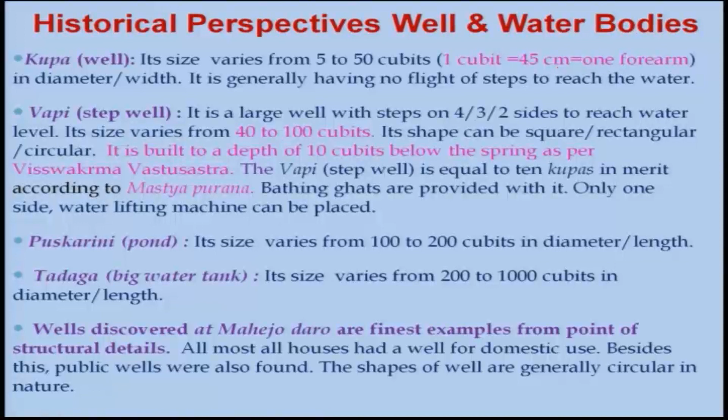Wells discovered at Mohenjo-daro and Harappa were the finest examples from the point of structural details. Almost all houses had a well for domestic use, and public wells were also found during the Indus Valley civilization excavations. Keep in mind that generally the shapes of wells are circular in nature, but if it is a big one, like a Vapi, step wells will sometimes be rectangular.

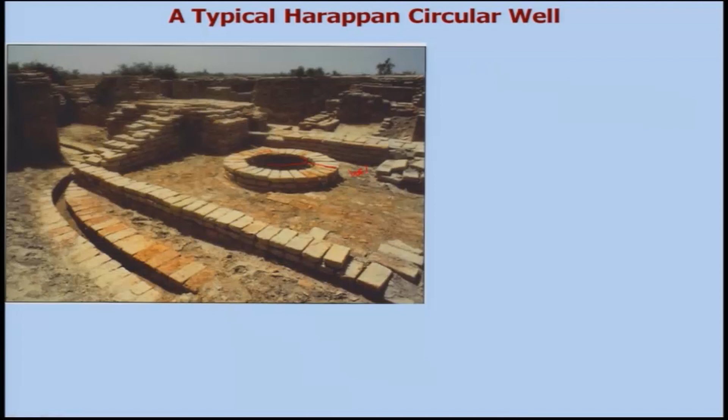Let us look at a typical Harappan circular well. If you look at this figure, this is the well, and these are all bricks, trapezoidal in nature, used to prevent inward collapse. Now suppose you want to make this kind of well and replicate it—I cannot, because where will I get trapezoidal bricks, who will make them for me?

At that time, people were making their own brick kilns; they had kilns of their own and could design and make the bricks themselves. Today it is not possible. When I was a kid, I had gone to a village, and I remember a person trying to make a house was also making a kiln for baking the bricks to be used in his house.

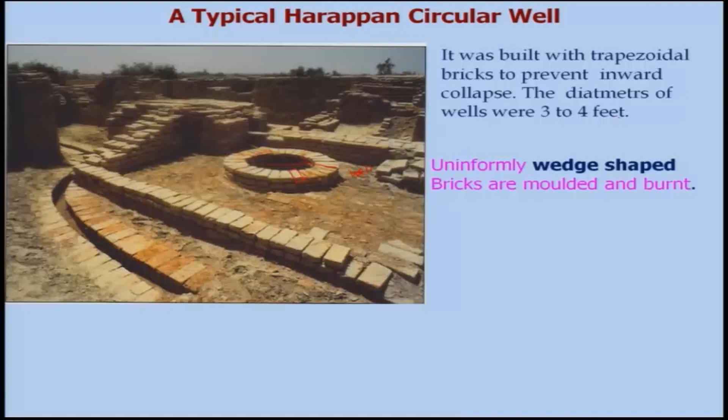The diameter of wells is around 3 to 4 feet. These wedge-shaped or trapezoidal bricks are molded and burnt properly, and the wider bricks are carefully curved. This curving is very essential to have a smooth surface, and generally mud mortar was used to bind these bricks.

This is a ground with pavements of brick laid here—these are the bricks. Look at these brick pavements and the well, which has a slope, because this is the drain. There is also another drainage system here, and from one corner it comes and passes through to this place.

Beside this, if you look at the top of the well, it was projected above the ground level, so that waste water will not enter into the well. This is not something people just did randomly, this is a well designed kind of thing.

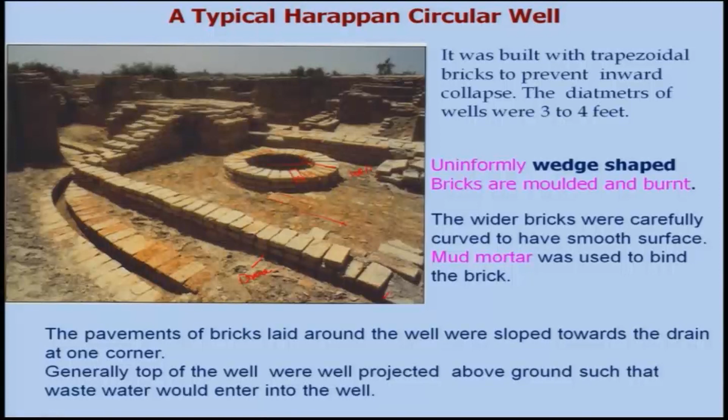There is also a lot of other land where water would be available, and they would store it from the rain in the form of tanks and ponds.

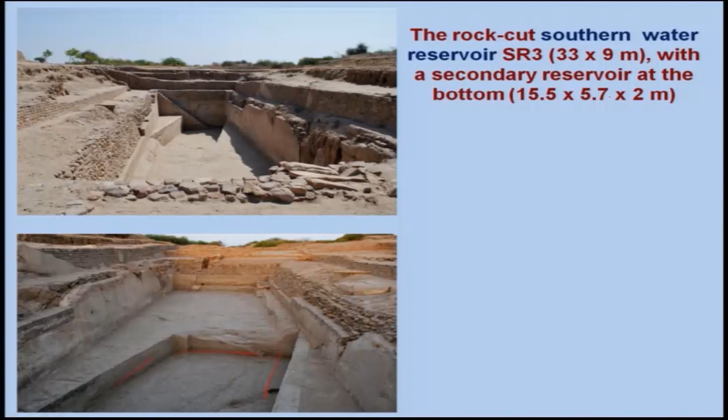Archaeologists found 3 massive reservoirs, used for storing fresh water brought by the rains, and also to store water diverted from the 2 nearby rivulets I discussed. That means they were using rainwater for storage, and also taking water from the rivulets or small rivers to store.

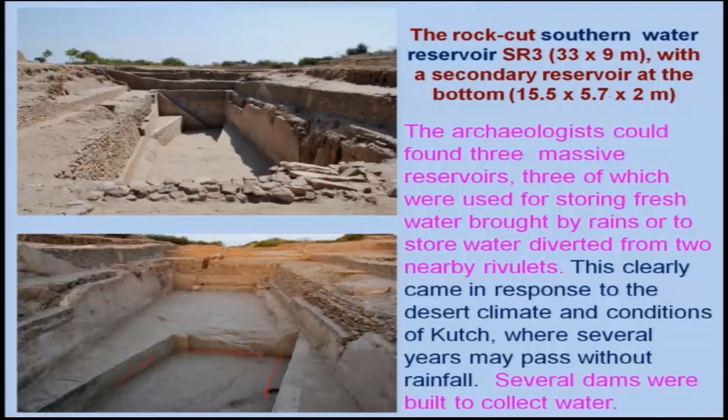This clearly indicates that proper management of water harvesting is essential to have a good life even in the desert climate condition of Kutch, where several years may pass without rainfall. Several dams were built to collect and preserve water. At that time people had concern, they had design, and they did it properly and used it - why not today? We will have to not only preserve it, but also use it sparingly, that is important.

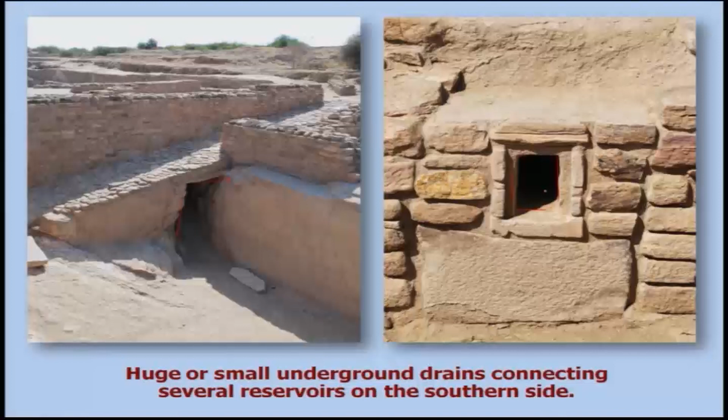One can see small underground drains connecting several reservoirs on the southern side. That means it is not the reservoirs alone, they are connected - if one reservoir has water, you can take it from another and use it. Suppose there is a flood on one side, the water will go to the other place not having water and be stored there. So there was interconnectivity during that time also.

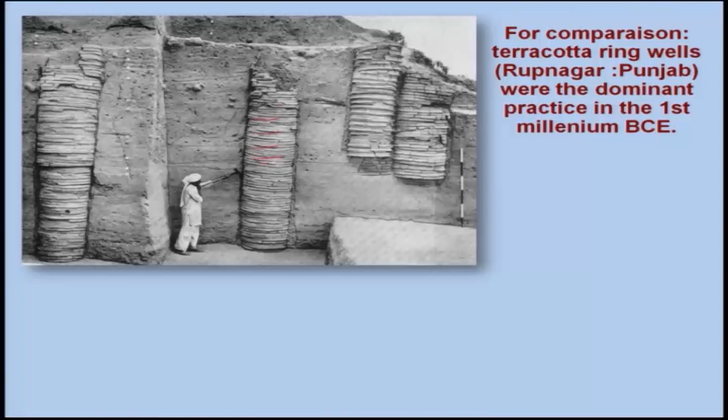These are the wells, dominant in Rupnagar. Now people are calling it Ropar, in Punjab. These wells dominated, and those are there in the first millennium BC. This has been dated by archaeologists.

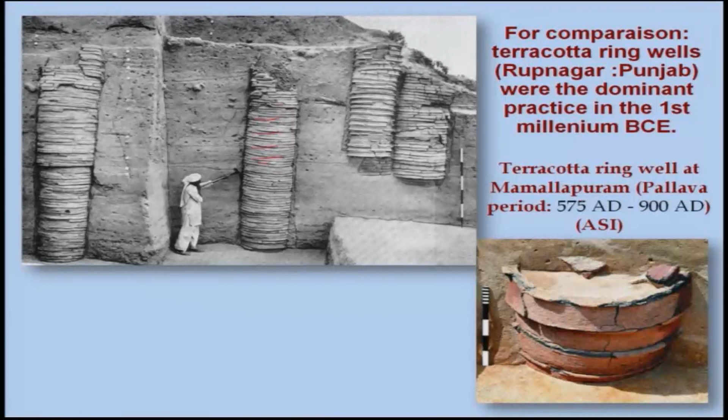Beside this, if you look at terracotta rings well at Mamallapuram in the Pallava period, like 575 AD to 900 AD, one can also find them. People have found earthen pipes, tunnels, undergrounds to maintain the flow of water, besides transporting it to distant places at various places like Burhanpur in MP, Golconda in AP, Bijapur in Karnataka, Aurangabad in Maharashtra, and several other places. I have just mentioned a few of them.

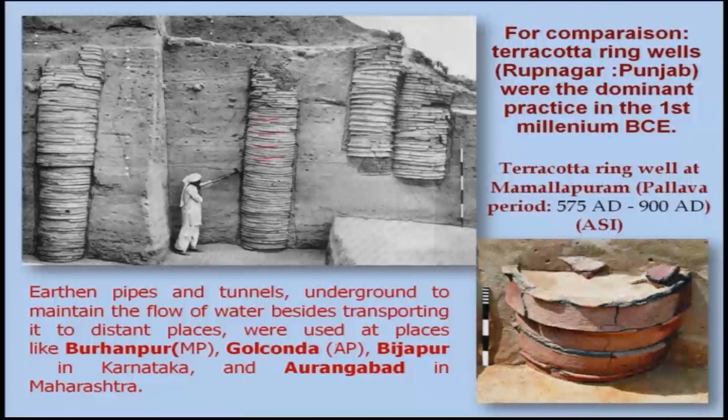That means there was a water harvesting system, and also tunnels and undergrounds to transport water from one place to another. That is very clear evidence available in our country at this moment.

Let me talk about Rani Ki Vav. If you look at Rani Ki Vav, it is basically built around the 11th century, a kind of sophisticated step well in Gujarat, built after the death of the husband of a queen around the 11th century. It is considered a World Heritage Site by UNESCO, which described it as an exceptional example of technological development in utilizing groundwater resources.

If you look at it, it was not known earlier, because it was buried under several layers of silt for almost 7 centuries. Around 1300 there was a flood in the Saraswati river, which closed all those things and put a lot of silt on it. So only 30 years back people could unravel that there is something like Rani Ki Vav, and it came to light. Rani Ki Vav was built in the complex Maru Gurjara architectural style.

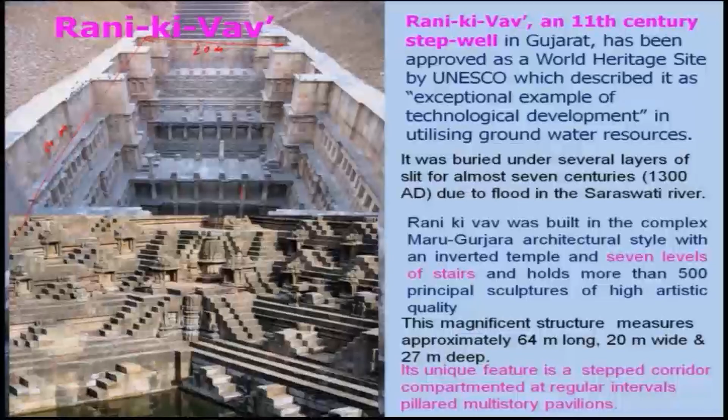So why would one elaborately build it this way - one question arises in my mind. The well is located at the westernmost end of the property, as I told, and it consists of a shaft 10 meters in diameter and 30 meters deep, holding water. If you look at this, it's something around 10 meters in diameter and the depth is around 30 meters, and a lot of sculptures are there in this.

Evidence suggests that the walls had been built out of brick, but faced with stone - that means brick was cladded with stone. How could they have done that? One question, because the stone and this brick have to be joined together. That is one question coming to my mind, and that technology has to be unraveled.

From this wall, vertical brackets project in pairs - these are all pairs, and they support different galleries of the well shaft properly. The bracketing is arranged in tiers and is richly carved. If you look at it, these are the carving points.

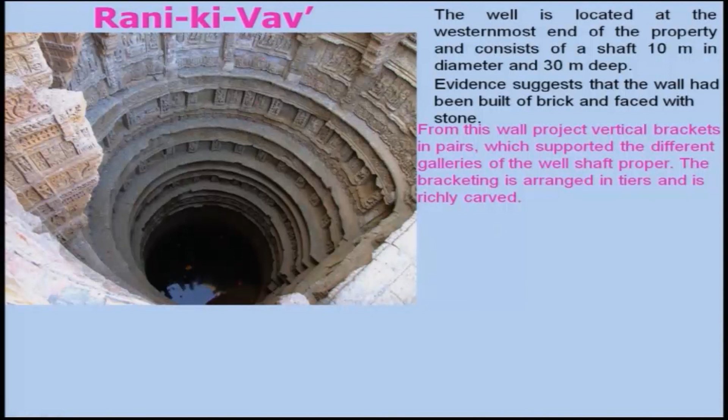So, these are the carved structures you can get in the wall. If you go to a small region here, you will find several statues, a lot of fine work on the stones. Therefore, one can clearly say Rani Ki Vav is the queen among the step wells of India. Till now, such a decorated, intricately designed and sculptured well we have not found. Of course it is done elsewhere, but not that extensively.

There is a small gate below the last step of the step well, leading to a tunnel of 30 kilometers, by which the king might escape whenever there was fear to his life due to invasion or something, and which leads to the town of Sidhpur near Patan. Now, if you think of that tunnel of 30 kilometers, how did they build it?

We now also need to build similar tunnels, because a lot of our Indian cities do not have a sewer system where people are living. If you want to put in a tunnel through which you can pass the sewer system, how will we do it? One can learn from that. Keep in mind that this gate is now being closed down because people may misuse it, and that is the marvel of the technology at that time, how people built it.

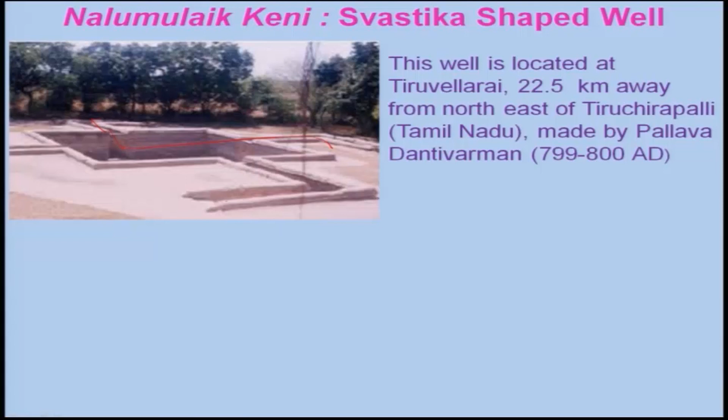And this shape is looking like, if you look at it, this is basically a swastik kind of thing. If you look at it, it goes this way, and similarly the other part will be like this. This is a swastik.

This is also known as Mari Pidugu Perun Kinaru in Tamil, a big temple well. It is near a temple and its size is around 37 square feet. It might have been used for the temple and irrigation of Devadana lands, because in earlier days temples also had certain lands.

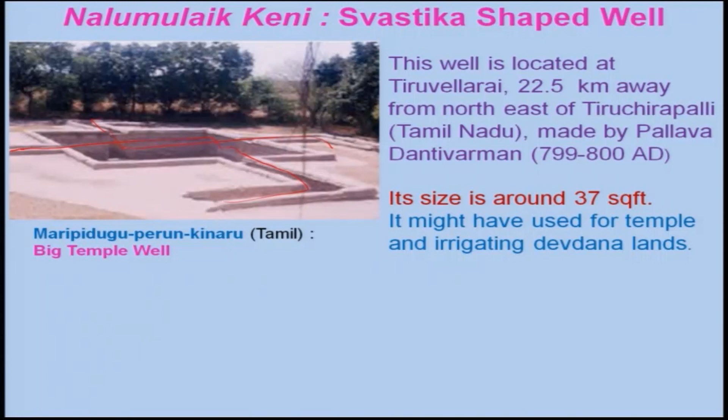And these are the steps, where people can enter and take a bath. I do not really know, but there is also some support system there for how they would bring the water, maybe water would be coming here and then they would be using it.

As I told you, there are 4 entrances here, one here, another entrance here, another will be somewhere here, and another here, and this side is also one entrance. The inner face of each portal and the outer walls and margins are made of dressed granite stones.

So people were having concern and they have used a lot of technology at that time, whichever was available, and then they tried to make these things.

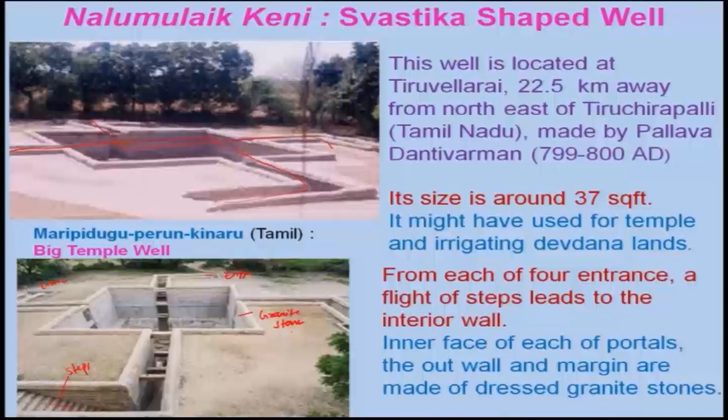If you look at it, there is a lot of water tanks in the temple, and the water from the temple tanks serves the vital purpose of recharging the underground aquifer, reducing the runoff, and enhancing the water stagnation time, thus ensuring sufficient water in the domestic wells during the summer months.

So if you look at this, this is one of the tanks I have shown, which is connected with one temple in the south, and I will also be talking a little bit about temple water tanks in the next lecture. So I will stop here, because the temple is a very important part of our culture, and therefore also the water harvesting you can see there. Thank you very much.